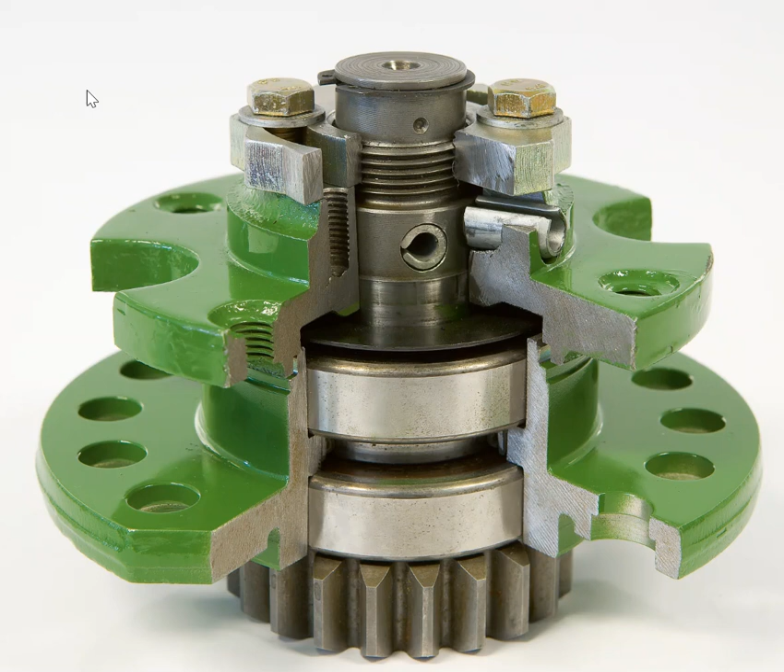Hello, and here are my top 10 reasons why I believe a Krone EC R 3-point hitch disc mower is the best on the market.

Reason number 1, Shear Protect. On a Krone, if the disc comes into contact with a rock, it will shear a roll pin. As you can see here, in this cutaway, the roll pin is sheared. After that happens, typically the disc will follow these threads up out of the way of the other discs so that you're not shearing roll pins all the way across the cutter bar if you don't shut her down in time.

Now you may say, yeah, other competitors, they've got Shear Protect, but I would argue, number one, roll pins are a lot cheaper than over $100 shear hub.

Number two, the ease of repair. Here you take out your attaching 4 disc bolts. You take these bolts out, knock your roll pins out, screw it back down on, knock your roll pins in, put your bolts back in, put your disc back on, and you're good to go. Also, while we're looking at this cutaway here, you can see the massive bearings.

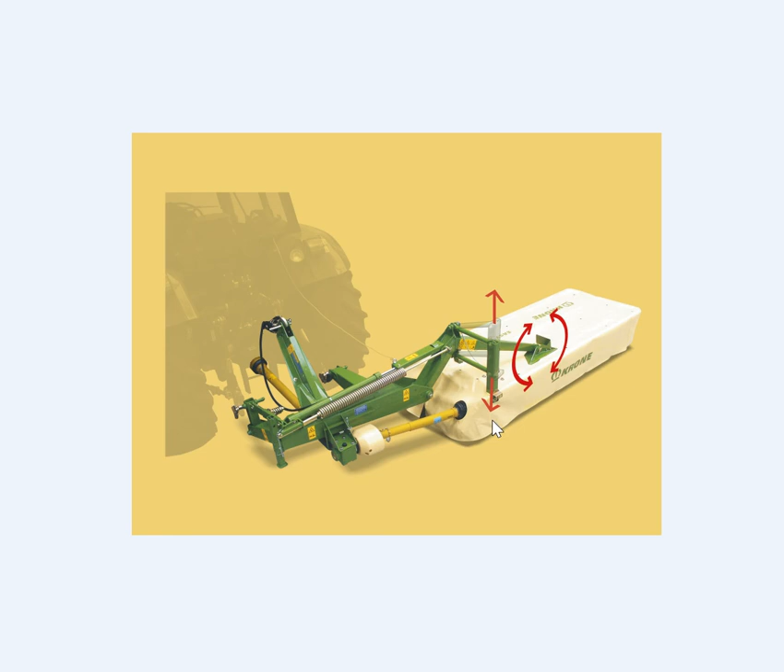As you can see, the EC series is floated by the center of gravity. What this does is give you improved flotation over a mower that would be floated from a pivot point. Here you're pivoting at the top compared to pivoting down on this edge of this cutter bar.

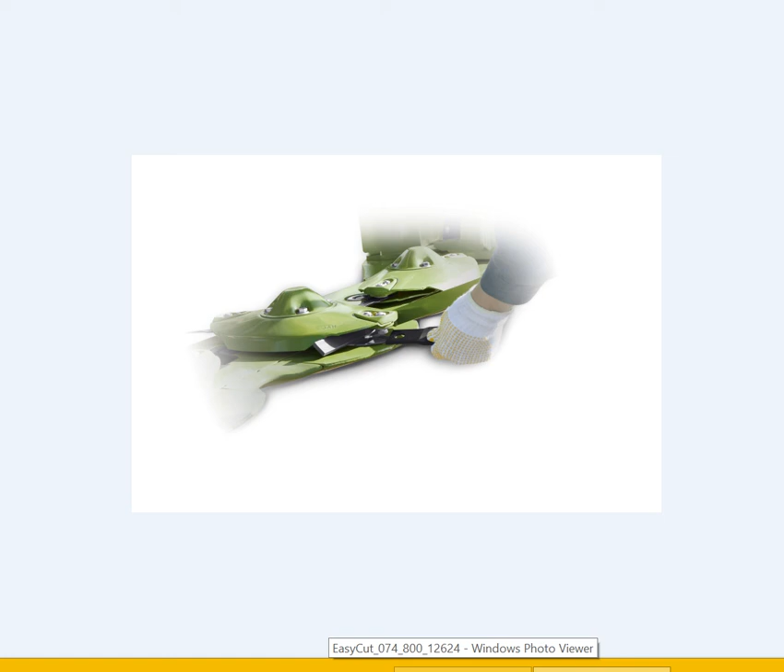Moving on to number 3. Number 3 is all the ECs come with quick change knives, compared to bolt-on knives. So here you just slide this lever in, turn it down, and you can change your knives with ease instead of having to have an electric impact and fighting with the bolts.

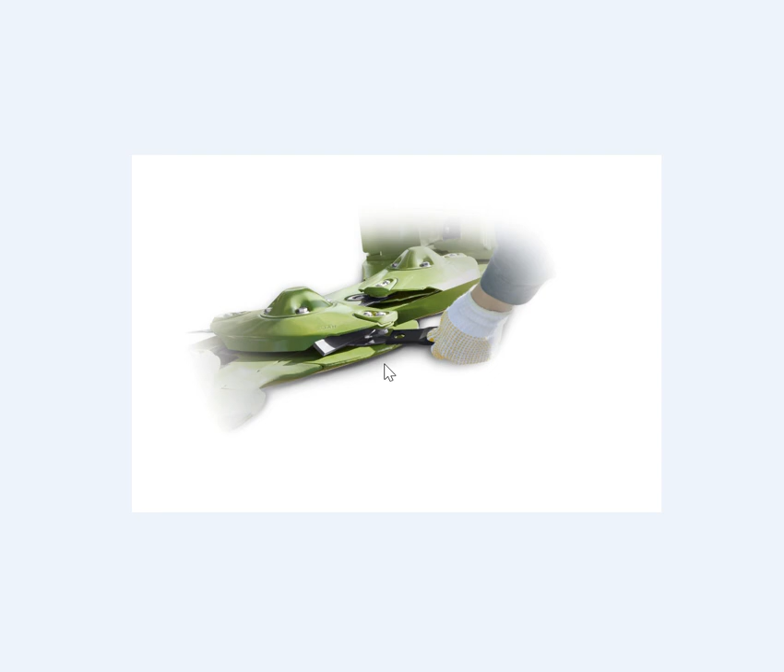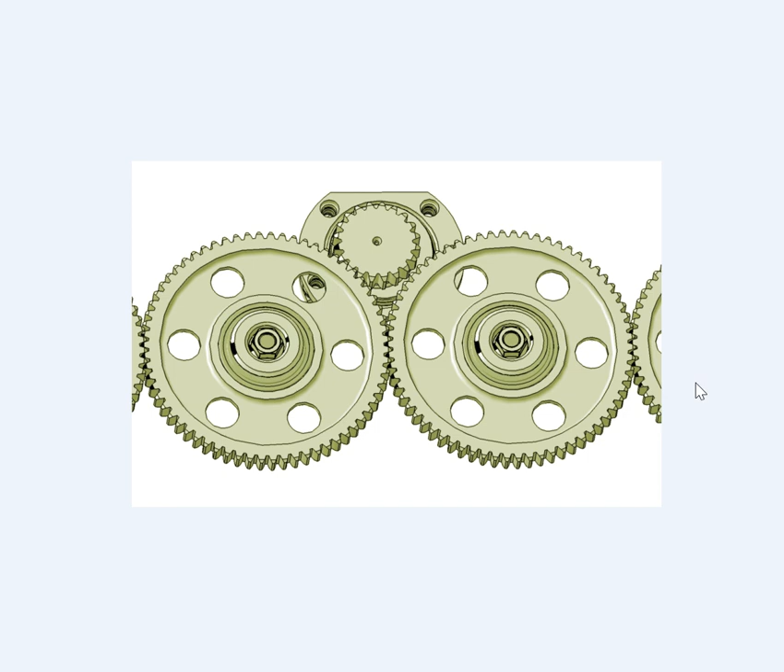Number 4, how the discs are actually driven. With a Krone cutter bar, the drive gears are along the back side, and the discs are driven off the drive gears, unlike the competition, which has a drive gear, a disc gear, a drive gear, a disc gear, and so on.

So what this does is, 1, increases the longevity of the cutter bar, 2, reduces the noise coming from the cutter bar because these gears are spinning so much slower than the gears found in the competition, because you can spin this pinion so much faster because of the ratio. Also, you can change the drive, so you can change the rotation of the disc depending on its location on the cutter bar.

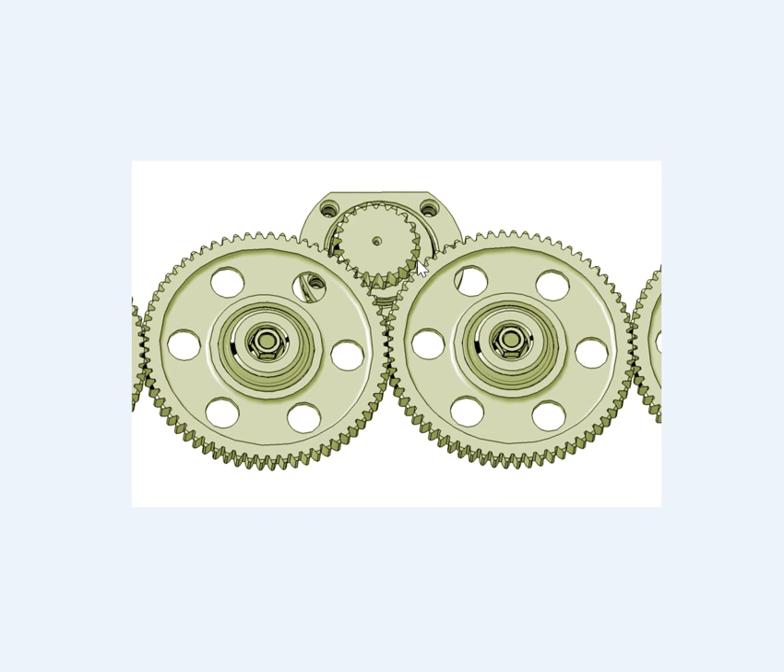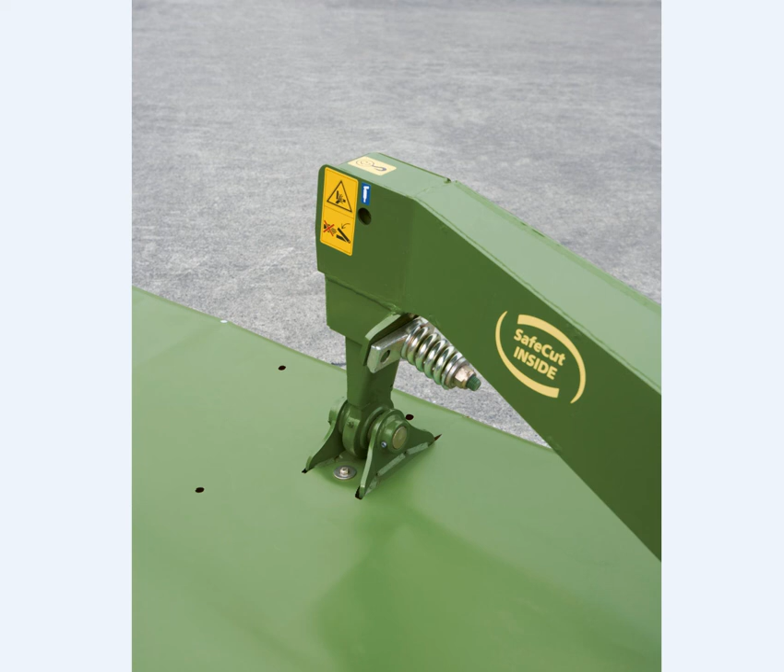Moving on to reason number 5, safety breakaway. On the ECRs, the safety breakaway is at the main flotation point of the cutter bar. So hopefully if you hit an object, the safety breakaway will trip and the cutter bar will move up and out of the way. On the regular ECs, it's over on the left hand side of the hitch.

Reason number 6. The discs are protected on the back side. Some competition, the back of the disc here is exposed. So if you went over top of a rock and the cutter bar came down, you could run the risk of damaging the disc or the cutter bar itself.

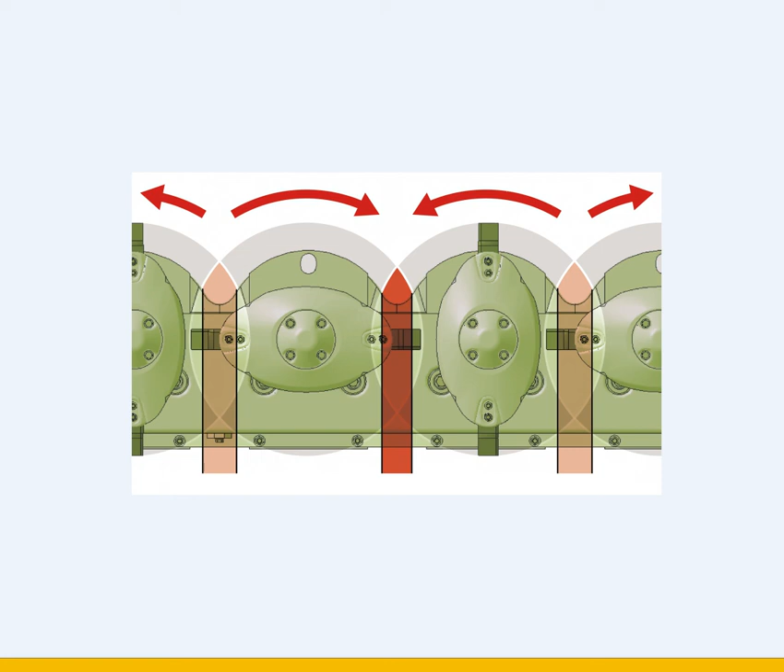Reason number 7. On the EasyCut mowers, the knives on the disc can rotate a full 360 degrees. So if they come in contact with an object, they can spin around and come back out.

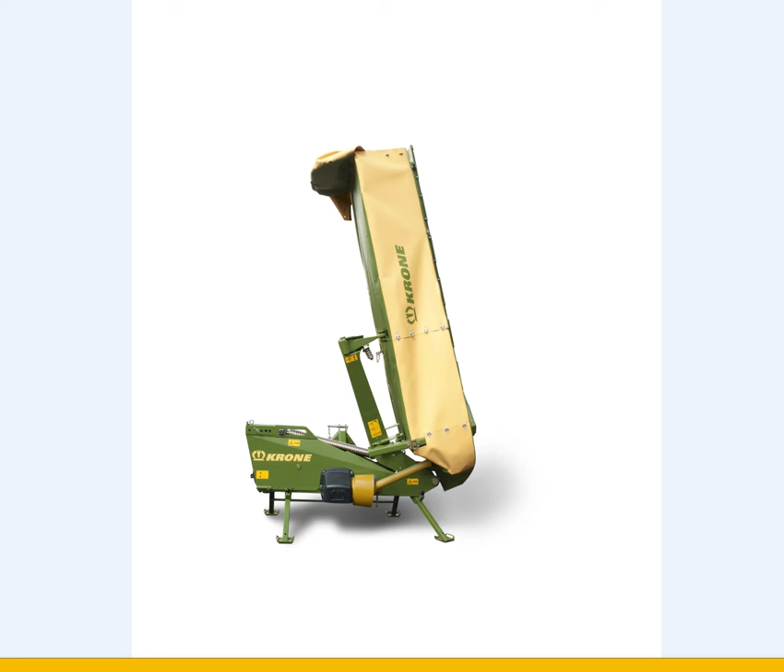Reason number 8. Krone mowers are direct drive. There are no belts.

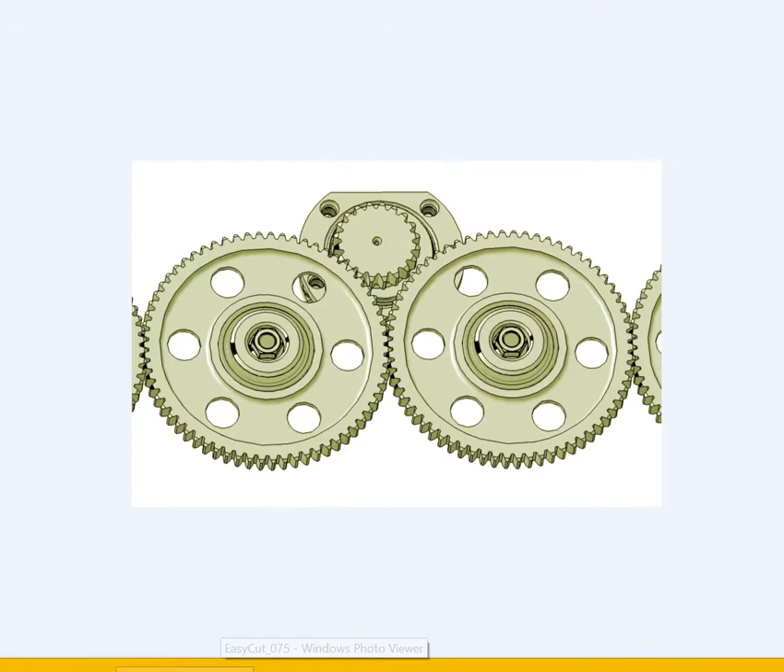Reason number 9. The cutter bar itself is superior to other cutter bars because of multiple reasons. 1, the cutter bar is driven from the back side instead of down through a disc. 2, the protection of the cutter bar. One being these weld-in guards so that if for some reason a knife got bent coming around, the knife will not skim the top of the cutter bar. Another is the heavy-duty protection skids out front.

Reason number 10. You have the option of storing the mower in the upright position.